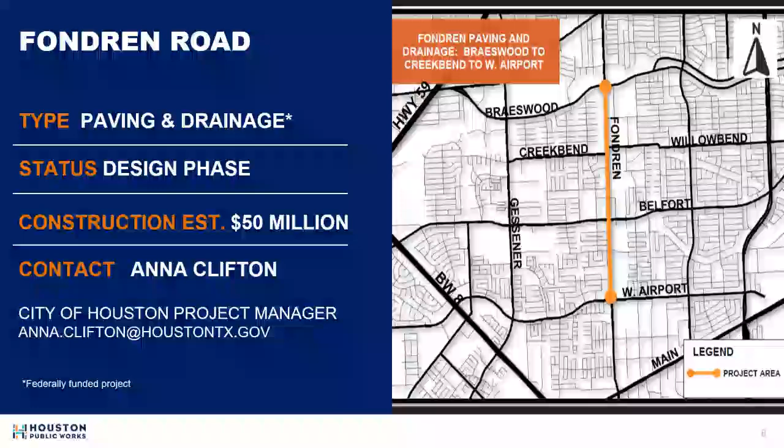Now, to walk us through some exciting design updates, we're joined by Marcel Strand from STV Incorporated. Marcel and the team have been hard at work shaping a vision that reflects this community's needs. We're thrilled to have you with us tonight, Marcel. Thank you for being here. Thank you, Kenya. We appreciate that.

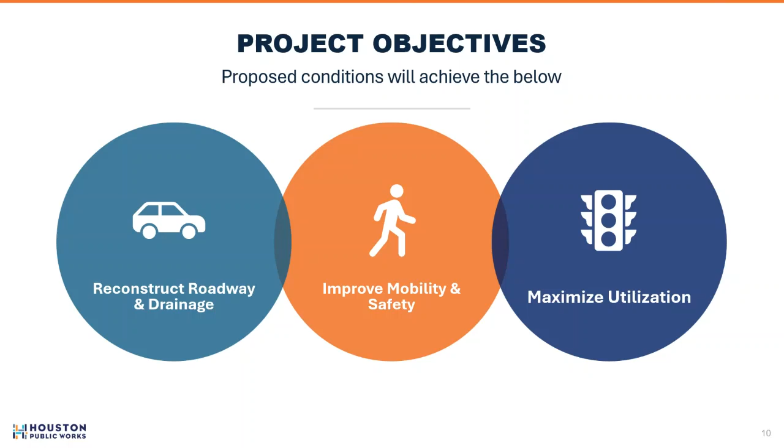The primary objectives for this 2.2-mile long project are to reconstruct our existing roadway and drainage system and provide a resilient and effective infrastructure, all while improving mobility and safety for all users, not only for vehicular, but also for pedestrians. Also, to maximize the utilization of various traffic control elements and devices.

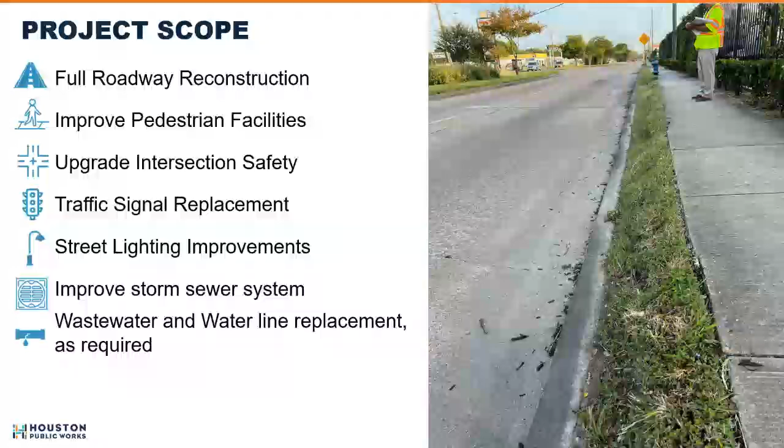Now, the city intends to achieve these three primary goals by including the following within our project scope: a full depth reconstruction of the roadway, including the pavement, improving pedestrian amenities, improving intersection safety, upgrade to the traffic signals and equipment and improve the operational efficiency of it, improved street lighting, and provide a new and efficient storm sewer system within the project limits, as well as upgrading our wastewater lines and water line replacements as required. Now, to appreciate the improvements that will be made, it's good to take a look at the existing conditions.

On this slide, we're seeing a cross-sectional view of the existing right-of-way width, lane configuration and dimensions for the southern section of our project. That's roughly a 1-mile long segment between West Airport Boulevard and Sanford Road. As you'll note here, it currently consists of 6 lanes with 4-foot wide sidewalks.

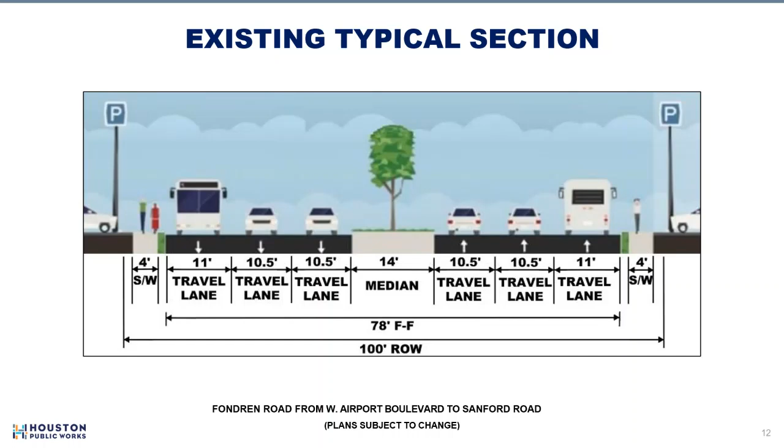Now let's take a look at the proposed conditions. What will the typical roadway section look like? For the southern segment, roughly 1 mile long between Airport and Sanford Road, we will be maintaining the existing 6-lane configuration, essentially the same pavement footprint. But I want to draw your attention to the improvements we're providing for the sidewalks abutting both sides of the right of way. We'll be proposing 6-foot nominal width sidewalks throughout.

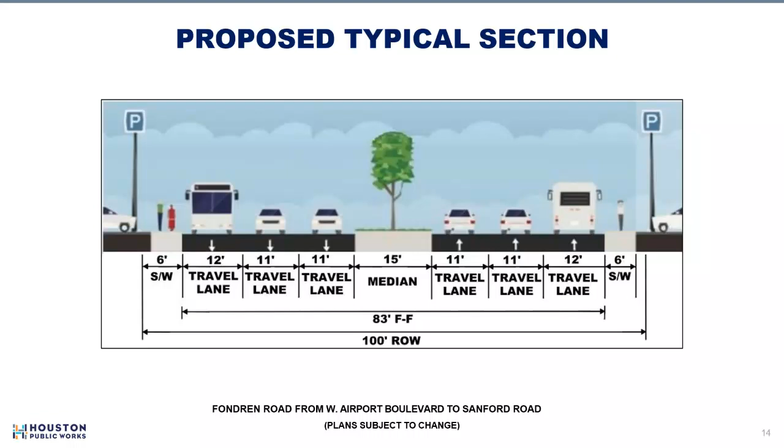For the northern segment, roughly 1 mile long between Sanford Road and South Braeswood, we'll again be maintaining the same general footprint, a 4-lane configuration. But in this case we'll be improving the sidewalk width for safety, providing 6-foot wide sidewalks.

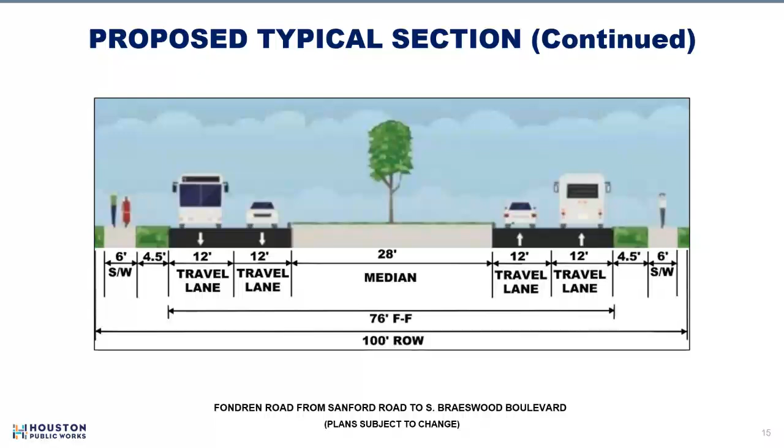Now, if we look at the conditions of the existing infrastructure, it's quite clear that improvements are necessary. It is indeed critical. We have throughout the project currently broken segments of pavement, missing or substandard sections of sidewalk and pedestrian ramps, and a wealth of other issues that need to be improved upon.

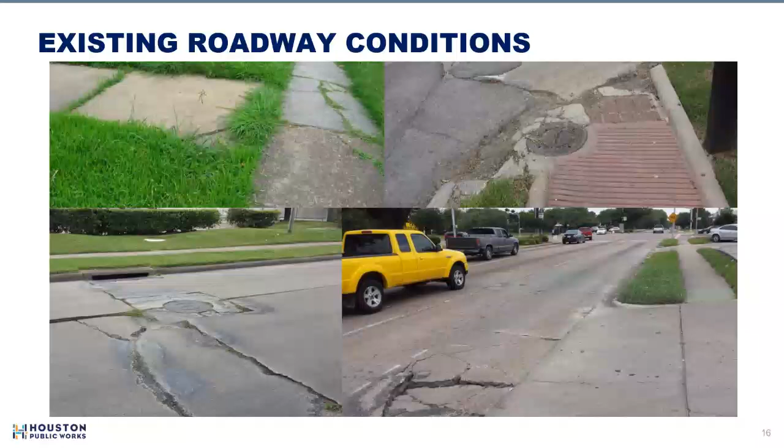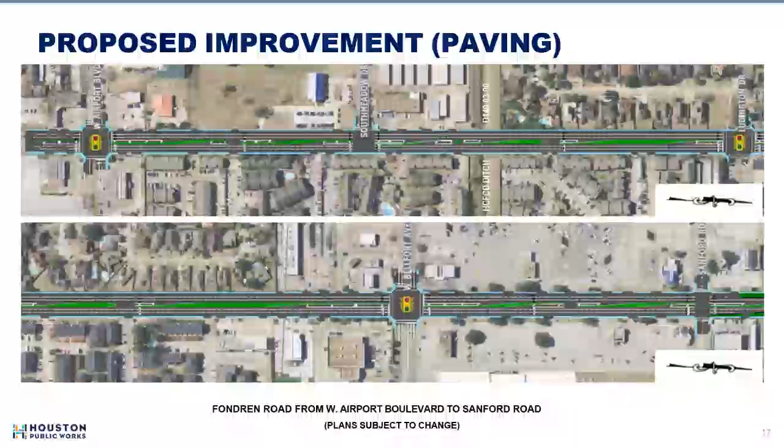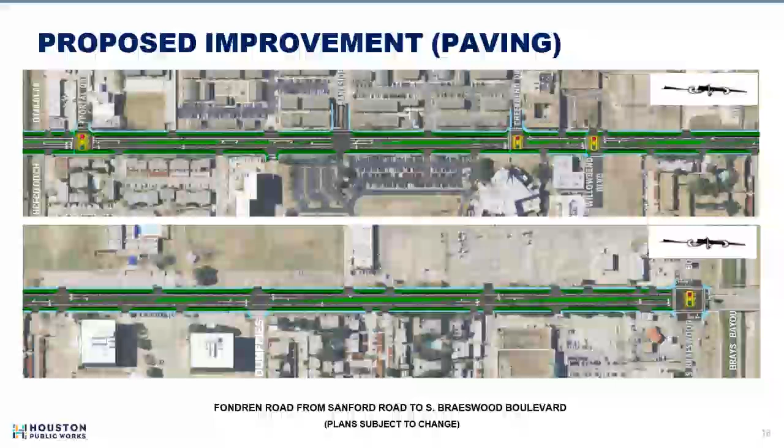For the next slide, this presents the same concept for the northern section. Again, we're maintaining the 4-lane configuration as is, and making provisions to optimize the locations of our median openings, and really controlling and monitoring the ingress of our left turn and one-way directional approaches.

Now, this reiterates the scope, which will include traffic signal enhancement at 7 intersections: at Airport Boulevard intersection, Ludington, Bellfort Avenue, Portal Drive, Creekbend, Willowbend, and at the Braeswood intersection with Fondren.

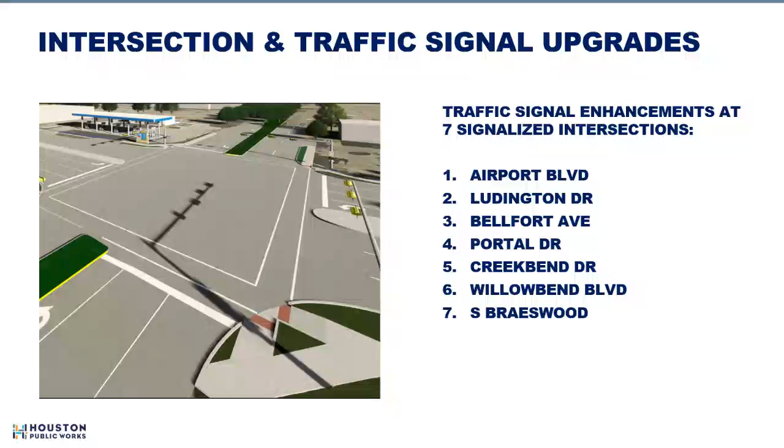In our next slide, this highlights that we want to be looking into providing pedestrian enhancements, which will include, for example, directional ramps where available, improved pavement striping, appropriate advanced signage, and traffic signals for both pedestrian and vehicular users as well.

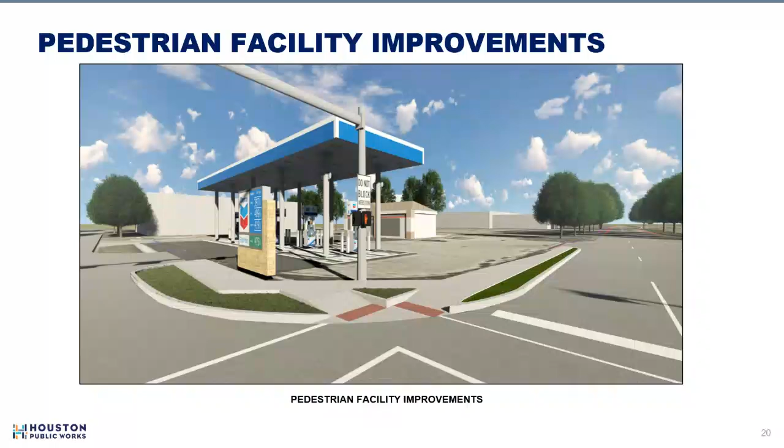In our next slide, one of the improvements we're definitely going to be making is to our drainage system, which will include buried storm sewer pipes and boxes. We call them RCBs, or reinforced concrete boxes, that will be resilient and provide the required capacity for the contributing storm runoff flows that come from the area.

Now, these will generally be located underneath the traveling lanes as conveyed here for that southern section of our project. They will run parallel along the roadway, providing inline detention capacity.

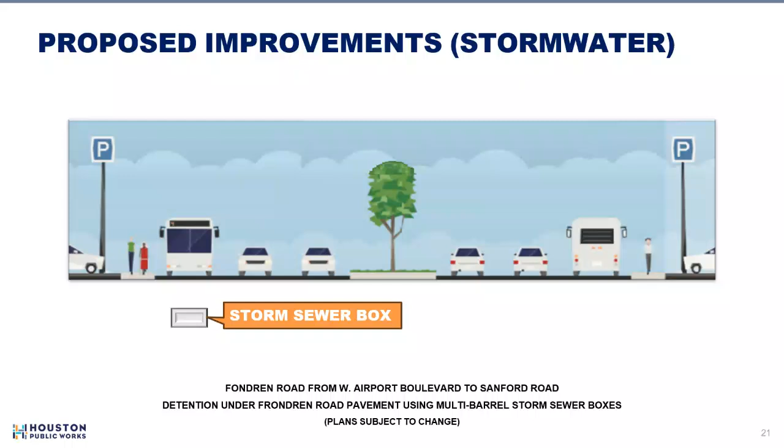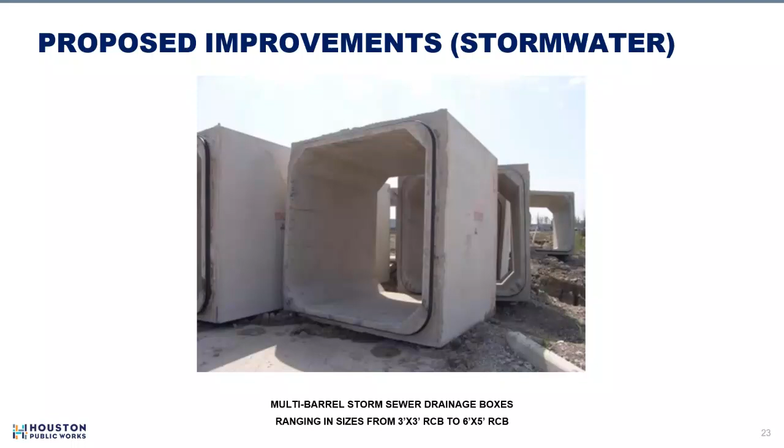In our next slide, it depicts what a section of this RCB, these reinforced concrete boxes, practically looks like. Of course, these will vary in size from a 3 by 3, or 3 foot wide by 3 foot deep, up to 6 feet by 5 foot wide. So they're going to be really large, but for a good benefit, really providing detention and improving the efficiency of the existing system.

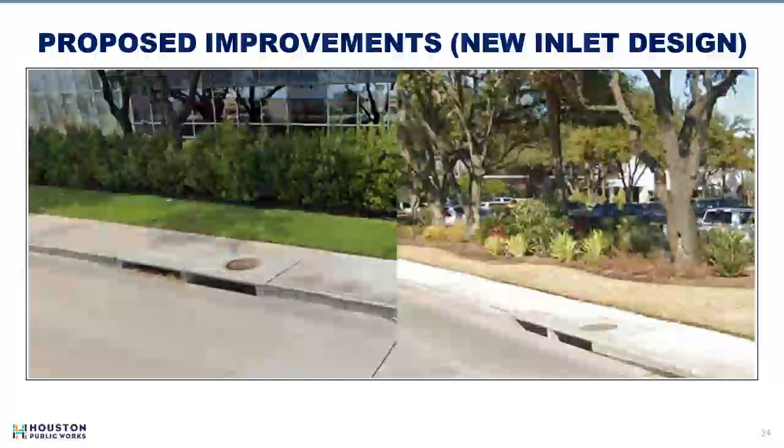In our next slide, it highlights another improvement related to the existing inlets that are there. We're going to replace them, providing larger, more effective inlets, which will essentially get the water, the runoff, underneath the ground a lot quicker than the current inlets are providing to date.

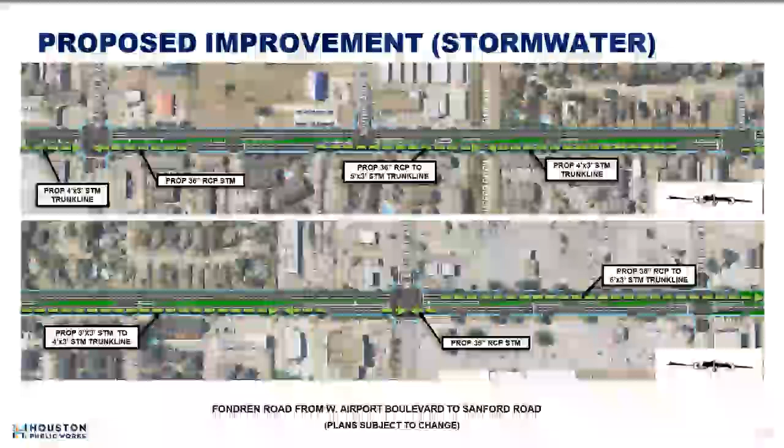In our next slide, it presents an overall planimetric of the horizontal location and the general outfall location of these proposed storm sewer trunk lines. Again, they mostly run along one half of the street, but at other times, as you'll see in our next slide, they may run in parallel along both the northbound and southbound sides of the street.

All of this is to increase drainage flow and provide better inlet placements, with a view to improving not only safety, but also capacity and level of service for the corridor. In this slide, we're presenting the overall planimetric and horizontal locations, approximately, all subject to change.

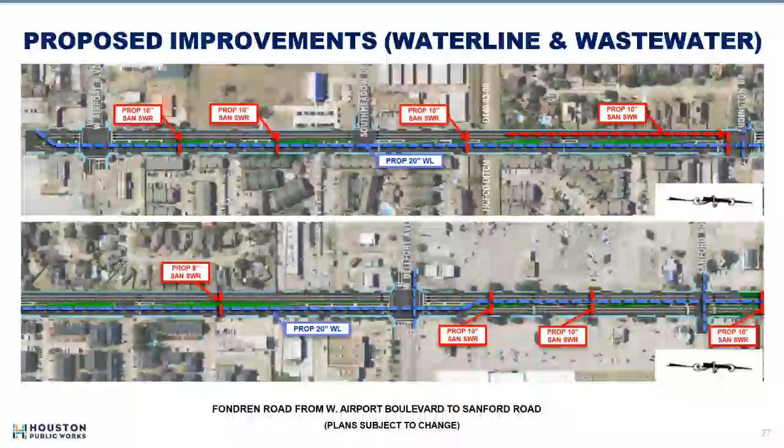We are proposing to replace the existing 20-inch diameter water line with a new 20-inch water line along the entire length of the 2-mile corridor. In addition to the water line, we'll also be replacing sanitary sewer laterals or service leads where or as needed.

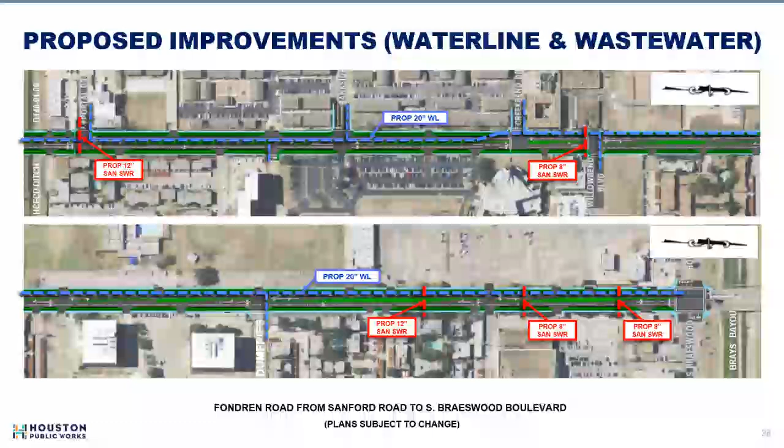This highlights the general concept and what we're planning for this project. At this time, we'll give our attention back to Kenya. Thank you, Marcel. Thank you for those updates, very informative, thank you again.

Going back to the next steps, this project is currently in the design phase with the final design to be completed in summer of 2027. Construction is expected to begin that fall, with the full project scheduled to wrap up by summer of 2029. It's a long-term investment, and we're committed to keeping you informed and involved every step of the way.